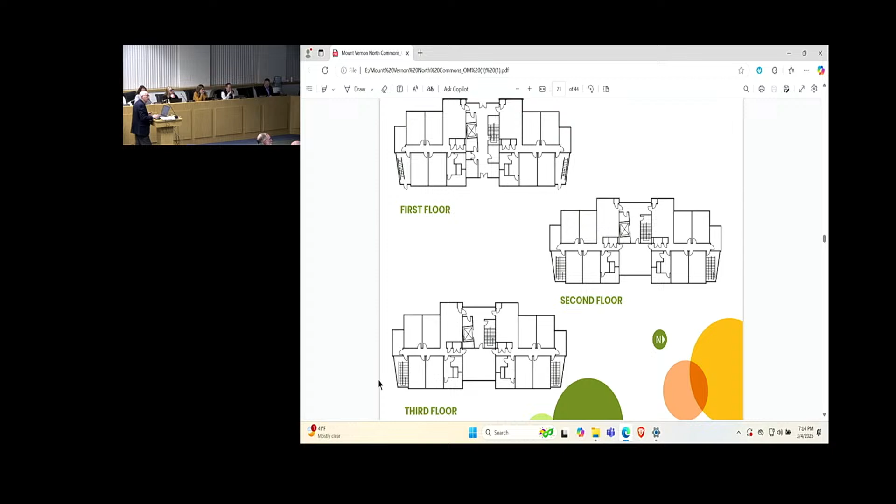This is the internal layout of the three-story building next to Mount Vernon Road. These are the individual units: main floor, second floor, third floor.

Again, we got some additional view there. That's the layout, the internal layout for the office area, the library. A close shot of the office building, looking from the south side. Interior layout.

This is one of the buildings in the center of the property that was used for classrooms and dormitories. Interior layout of that. Again, this is the dental school. Layout of that.

This is the maintenance garage on the northeast corner of the property that you can see from Welch Road. And here's an aerial view from the top. Another aerial shot from the northwest corner of the property at the intersection of Welch Road and Mount Vernon Road, right there.

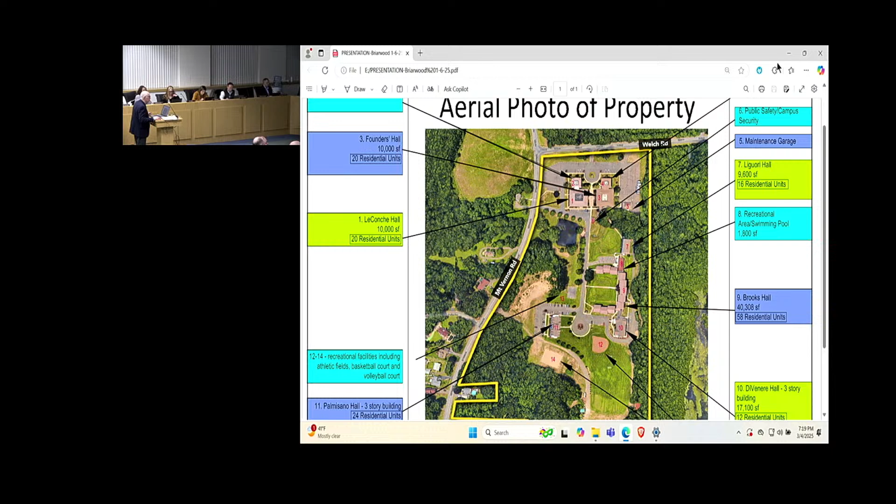I'm going to go over a few other exhibits, and then I'm going to get back to this map just so it's easy to see where things are.

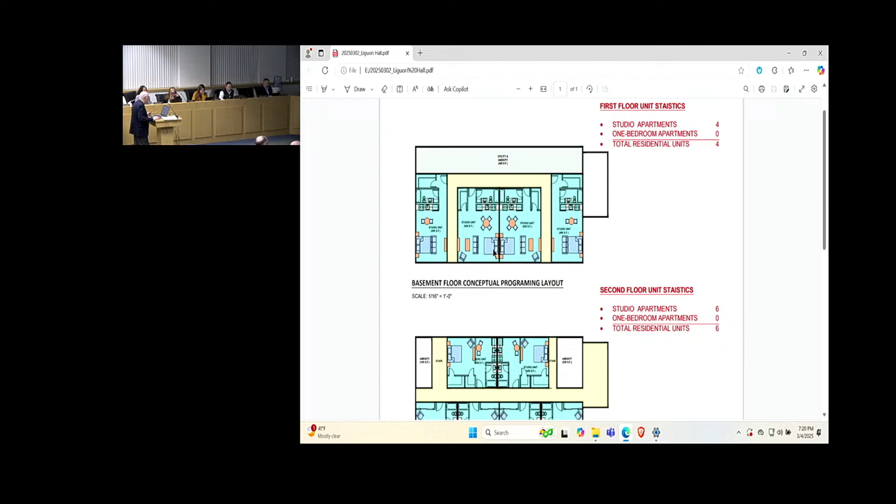Okay, these are the interior layouts, architectural interior layouts of the buildings. So these are 1-bedroom and studio units. I believe the blue are the studio units, and then the greens are the 1-bedroom units. That's Liguori Hall, which is the 3-story building.

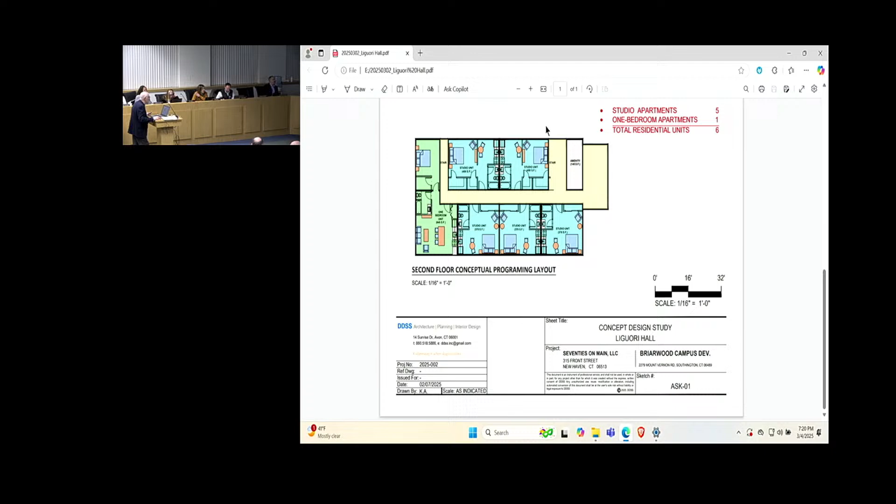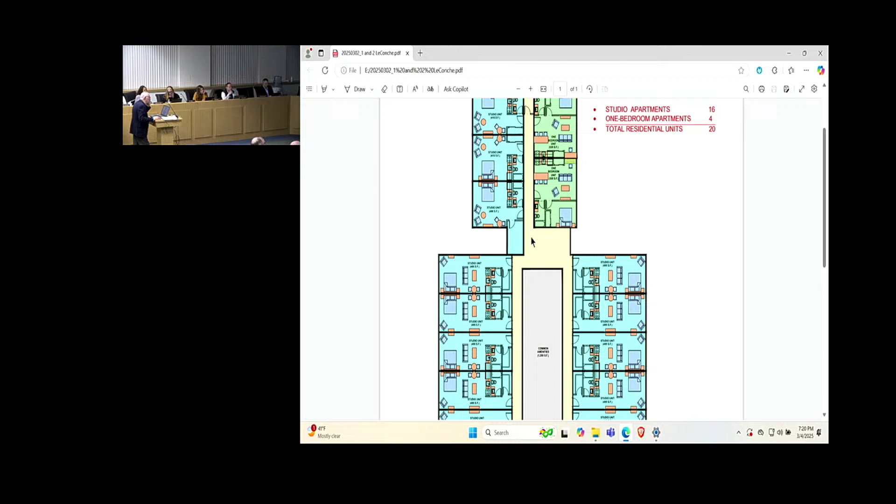Similar situation, you have another building there which has the proposed interior layouts that you were interested in knowing. 1-bedroom and a studio. First floor, studio apartments and 1-bedroom apartments. There's 16 studio apartments there and 4 1-bedroom apartments, for a total of 20.

These are the townhouses, which will have 14 studio apartments and no one-bedroom apartments. These will be converted all to studio apartments because the size of the space doesn't permit enough space for one-bedrooms. That was the basement, the one you were just on. This is Brooks Hall, the one that has the existing townhouses.

This is the basement. Essentially, it's a full walk-in floor from the rear of the building. That's why you don't see units to the right or left. This will be the first floor, walking in through the lobby, through the main entrance of the building.

These are 13 studio apartments and 12 one-bedrooms. The second floor will be 21 one-bedroom apartments. So this building currently has a little over 20 units, 21 units, that are 3-bedroom townhouses, existing with fully equipped kitchen, bathrooms, everything.

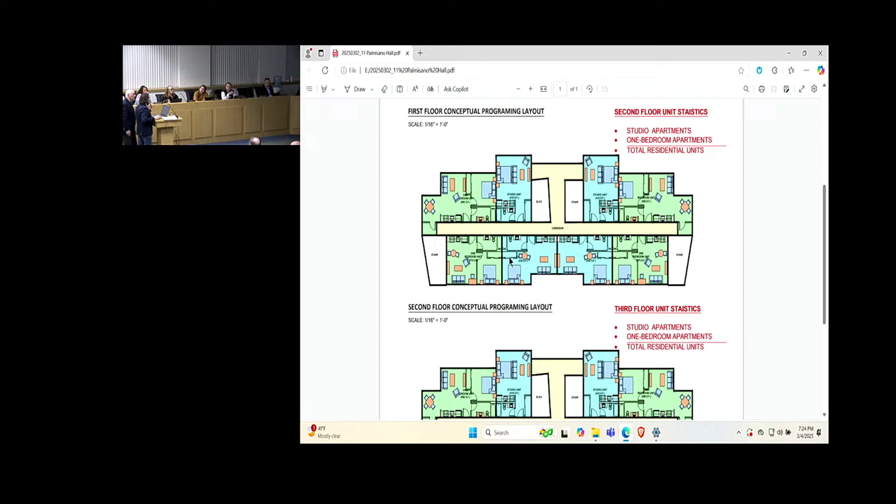This building particularly does not have amenities. Other buildings do. For example, Founders Hall, which is one of the 2 buildings in the front of the property, is essentially almost like a donut type of construction, and has 1,285 square feet available for amenities, which will remain indoors.

Obviously, the property itself lends itself to the exterior being used, the parks and all the exterior space. But we're definitely looking to include the typical amenities, or the most sought-after amenities, that are common in 55-plus and elderly communities. I don't want to name any specific ones, but the ones we can think of could be an art room, a library, a quiet space, all different types of amenities and spaces to make a real comfortable lifestyle.

So I know we ripped through this, but the concept is there. All the buildings besides the maintenance building will be converted within the footprint, so no building up, no building extensions. It's using the existing footprint to convert them into the complex.

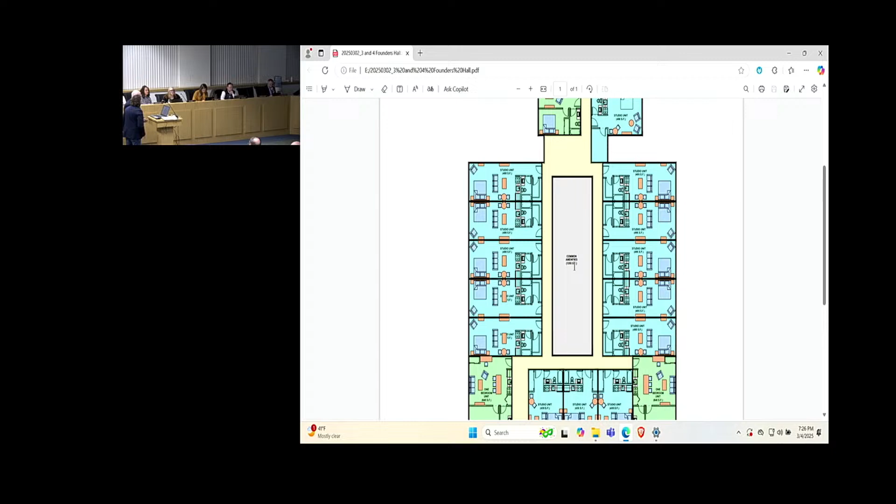Okay, I'm going to utilize this map throughout the presentation, Mr. Chairman.

So this property, as we discussed, is at the corner of Welch Road and Mount Vernon Road. The address is 2279 Mount Vernon Road, just south of the Lake Compounce facility. This property is known as Briarwood College, and was used at one time, as indicated, by 800 people, students and staff combined. The property is zoned R40, served by public water and septic systems.

It contains 33 acres of land, which slopes west to east and north to south, with some going to the center of the property where there's a stream into a pond, then out to 8 Mile River to the east. There are 7 buildings of various sizes and shapes totaling 114,000 square feet.

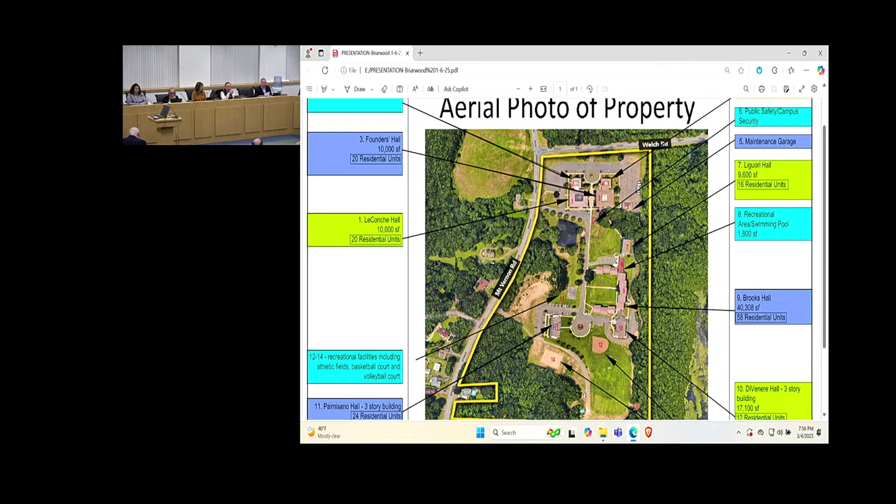So at this time, we're going to open it up to members of the public who are in support of this application. If they can come to the podium, and please again state your name and address for the record. Anyone who supports this application, please come to the podium. Going twice? All right. Anyone who is opposed to the application, or is on the fence about it, please come up to the podium — again, start with your name and address and share your thoughts with us, please.

Good evening, Board. Jonathan Potter, 176 Mountain Pond Road, just off the abutters list. When you go to the end of my driveway and look north, you can pretty much see the property, so pretty close by.

I thought I was going to speak in favor of this, but they presented their plan, so I'm not. A couple things.

The age-restricted housing is a nice idea. The town really did their homework when they planned it out, and it's nice and flexible. A couple things I like about it: standalone units, that's good, comes from 4E31 in the code. Owner occupied, rentals prohibited, that's 4E32.

The building footprints shall be varied by avoiding long expanses of single plane walls. If we get the other photo up, you're going to see long expanses of single plane walls. What they've just proposed just does not fit the character of the neighborhood.